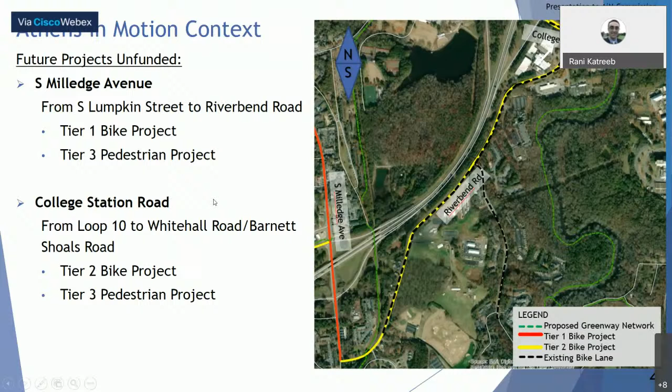On this slide you can see the existing bike facilities. It's unique that on Riverbend Road, the first 850 feet starting from South Milledge has no bike facilities and no sidewalk. The bike facility starts about 200 feet before the entrance of the UGA golf course and continues on both sides of the road all the way to College Station.

The sidewalk and multi-use path alternatives are proposed on the right-hand side along the entire alignment. It's important you understand the alignment nature and the fact that there's no bike facilities for the first 850 feet along this 7,300 feet of roadway.

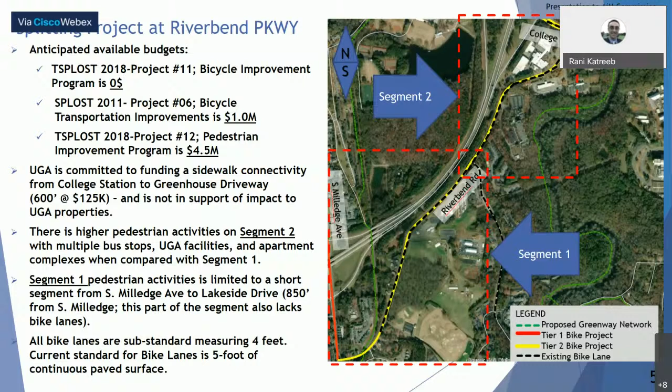Riverbend Road segment 1 starts from South Milledge with no bike facilities or bike lanes, crosses the railroad with no bike lanes, and then crosses Lakeside Drive, also with no bike lanes. There is a short segment of sidewalk that sits on private property. It's not typical today that we allow that; typically sidewalk is on public property. At 850 feet from South Milledge, the bike facility is substandard to today's standard.

Today's standard is 5 feet minimum, but we have 4-foot bike lanes and 11 feet of travel lanes that continue up to the end of segment 1, which ends at Riverbend Parkway, as you can see in the top right picture. Segment 2 starts from Riverbend Parkway on the same side and continues along that side up to College Station, with 4-foot bike lanes today and 11-foot travel lanes.

Rani, can you go back to that previous slide? I actually just rode this whole segment about an hour and a half ago. Oh my gosh, Carol, I rode it during lunch. Okay, and I noticed, coming from Milledge, one of the things as you come up past the golf course and the bus area where the UGA buses hang out...

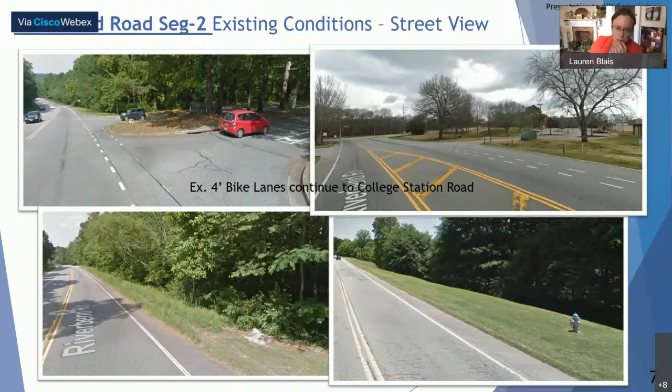Lots more, no problem. You guys have seen those slides with the details, including the length of the facility. This slide goes over the sidewalk alternatives, connecting South Milledge with College Station. It's good to identify the beginning and end of the project. As I walk you through each segment: Segment 1 starts from Milledge Avenue and ends at Riverbend Parkway. Segment 2 starts right before Riverbend Parkway and ends at College Station. So there is an overlap, and during our cost estimates we identified that if we select the entire project, there would be a cost saving because we're not doing the intersection twice.

All in all, we've looked at 4 different sidewalk alternatives, including a 7-foot sidewalk, with a cost estimate ranging between $2.7 to $6.3 million. Mainly this cost jump is because of major retaining walls along this project for some alternatives, which we will show here in a minute.

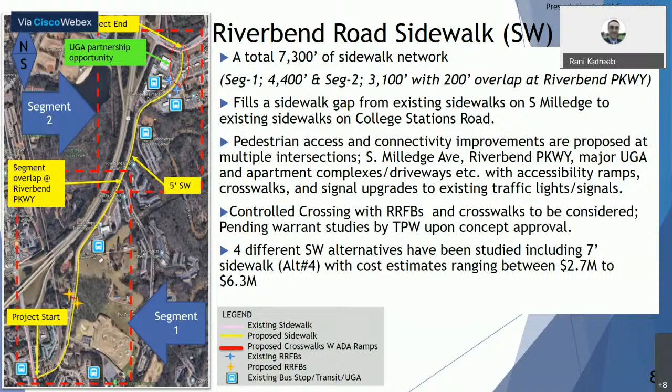The first alternative for a sidewalk is a rural section shoulder, 5-foot sidewalk. It has multiple advantages, including the lowest construction cost for a sidewalk, as there will be no curb and gutter. So it would be grading, a 5-foot sidewalk, and some drainage improvements behind the sidewalk. The sidewalk is further away from the road, the bike lanes are separate from pedestrians, only minor drainage improvements are needed, and no retaining walls.

The disadvantages: there is a large footprint that has a great impact on adjacent parcels, moderate need for right-of-way and construction easements, and high property impact. You can see the cost estimate breakdown for each alternative, for each segment. Segment 1 uniquely has that railroad coordination cost associated with it.

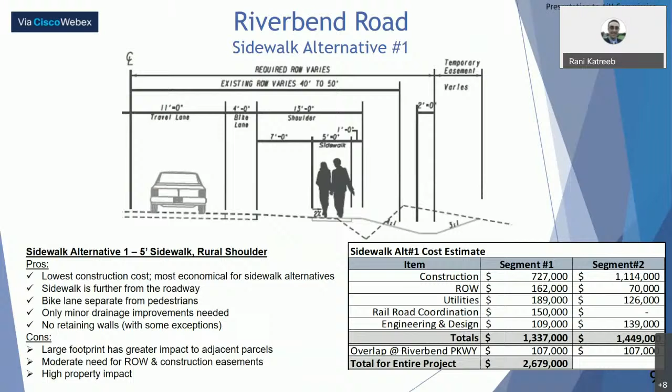With that, I'll move to the second alternative: a 5-foot sidewalk on an urban shoulder with curb and gutter. The advantage of curb and gutter is higher safety for pedestrians walking on the sidewalk, since cars are delineated where they need to keep their wheels. We do have a bike lane here too, so that's an additional safety factor. So there is a moderate cost for construction, bike lane separate from pedestrians, and no retaining walls.

The disadvantages for this option include some retaining walls that will increase cost, some pipe and drainage system will be needed, moderate need for right-of-way and construction easements, and moderate to high property impact. The cost estimates here are shown for each segment and also for the total alignment.

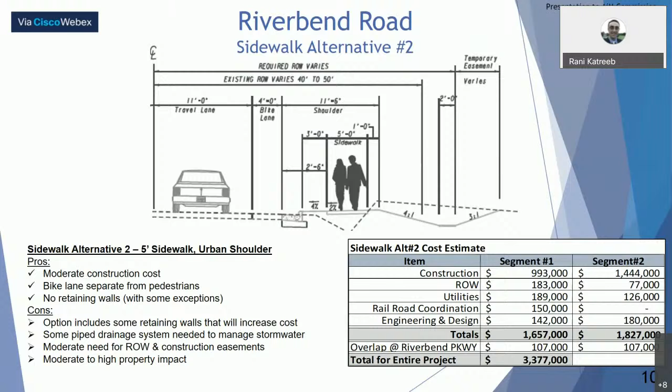The third alternative is a hybrid approach. It will help the department pick and choose what typical section to use to reduce cost, because when there is no curb and gutter, it's a lot cheaper than placing curb and gutter and having to manage that stormwater with an underground pipe system.

At the same time, we incorporated retaining walls to limit impacts and provide a concept that's more favorable to UGA. So we incorporated those walls and their costs, and you can see the cost increase dramatically for segment 2, for segment 1, and a little bit for segment 2, because we had to utilize walls for segment 2 in the second alternative anyway with curb and gutter. There's really no way without using walls on segment 2.

Pros: flexible design that optimizes field conditions, optimal footprint that reduces right-of-way cost in some areas, bike lanes separate from pedestrians, and reduces property impact. Disadvantages: higher cost compared with sidewalk alternatives 1 and 2, requires piped drainage system to manage stormwater, and includes significant retaining wall installations.

The fourth alternative, the real difference here is that we're showing a wider sidewalk than a 5-foot sidewalk. That means more impact, higher retaining walls, and more cost, with similar pros and cons to alternative 3.

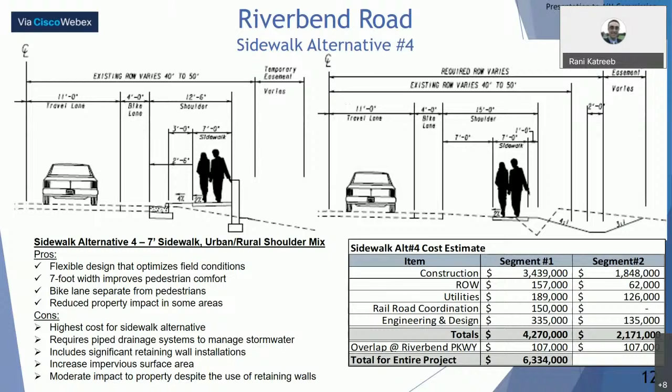The multi-use path alternatives run along the same alignment, starting from South Milledge and ending at College Station. UGA remains supportive for the amount that they stated, but they did not state a higher amount for increased cost for a multi-use path. So if we put a multi-use path in, I'm not getting the impression that they are willing to pay more for the concrete that would have to go from 5 to 10 feet wide.

However, this alignment of multi-use path goes along the same alignment as the sidewalk, with an overlap for the two segments at Riverbend Parkway. Three different multi-use path alternatives have been studied, with cost estimates ranging between $4.7 to $6.8 million.

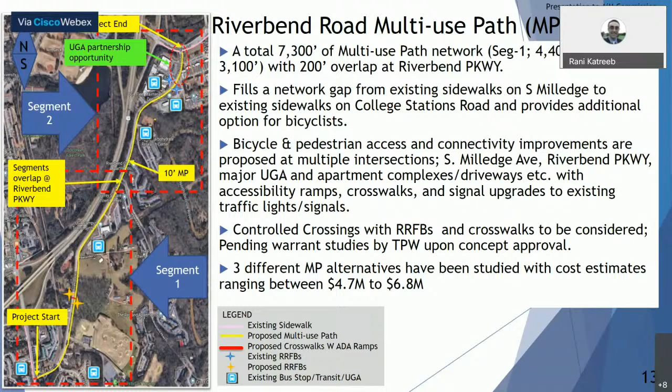The first alternative for a multi-use path is unique. Here we're looking at removing one bike lane, not both, just one from one side, and taking advantage of that existing 4 feet of roadway to build a 10-foot multi-use path. We also have to use retaining walls, but this concept does not show the use of retaining walls to the limits where the impact for UGA would be limited or minimal.

There will be impact to UGA with this concept, and therefore we provide alternative 3 for a multi-use path with more significant retaining wall usage to limit that impact.

Pros for this concept: most economical alternative for multi-use path, the cheapest among all 3. The 10-foot width further improves pedestrian comfort and provides separate shared facilities for bicyclists.

Disadvantages: large footprint compared with sidewalk alternatives, increased cost compared to sidewalk alternatives, bike and pedestrians share the same path, requires piped drainage system to manage stormwater, and high property impact due to limited use of walls.

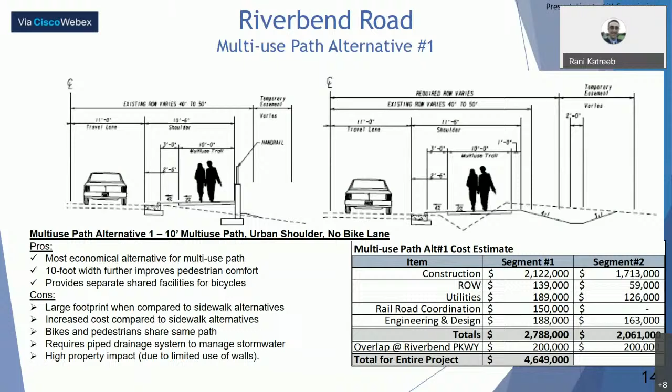The second alternative for multi-use path, we call it a redundant approach, but we still want to show it. We spent the time and effort to look at the alignment and impact, so we'll show it and talk about it a little bit.

This multi-use path adds a path with curb and gutter along the entire alignment from South Milledge all the way to College Station. This alternative has the most property impact along the entire corridor.

Pros for this alternative: 10-foot wide, further improving pedestrian comfort, with a separate bike facilities option. The cons: higher cost for multi-use path, requires some retaining walls, larger footprint with high impact to property, bikes and pedestrians share same path, requires piped drainage systems to manage stormwater, and increased impervious surface area.

We bring this up because stormwater and stormwater runoff is something we want to pay attention to. This specific alternative has the most increased stormwater added to the area, so we have to be very thoughtful of what we are doing here.

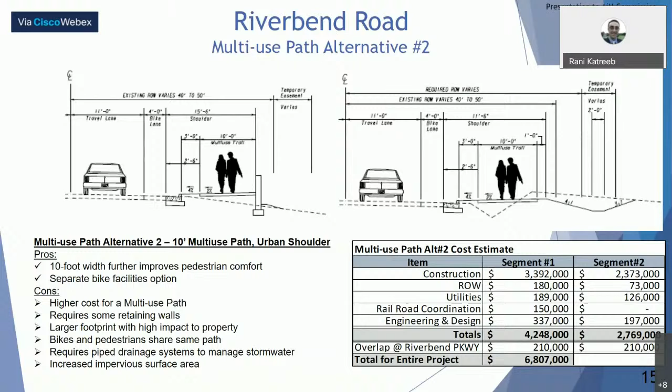The third alternative for multi-use path is the first alternative with heavy use of retaining walls to limit impacts to property.

The pros for this alternative: most expensive multi-use path alternative, with 10-foot width further improving pedestrian comfort and the lowest impact to property when compared with alternatives 1 and 2 for multi-use path.

Disadvantages: increased cost due to extensive use of retaining walls, increased cost compared to sidewalk alternatives, bikes and pedestrians share the same path, requires piped drainage system to manage stormwater, and includes significant retaining wall installations.

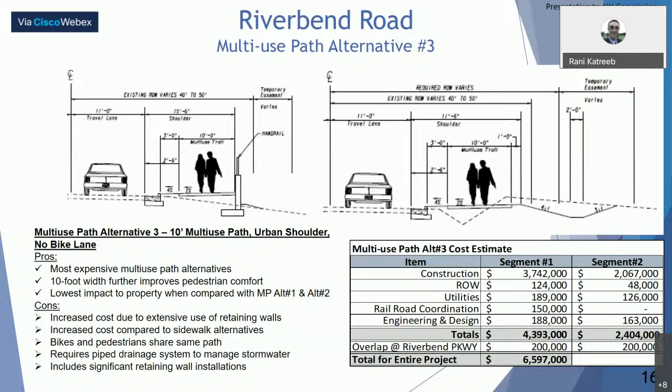With that, we get to the slide where we show the difference between all these alternatives and the cost estimates associated with them. I know last time this was a little overwhelming, but I'll take a minute and explain what I've provided additional this time.

For the sake of comparison, I added another slide to show the entire corridor comparison, not just one segment. So the first slide shows the entire alignment from South Milledge all the way to College Station.

The highlighted red with red arrows are more apples-to-apples comparisons when we compare a sidewalk that has little retaining walls with heavy impact to property, versus another sidewalk with that kind of impact to property but little use of retaining walls. When we use heavier retaining walls to limit that impact, we want to show that as well when compared to a multi-use path. That's what we've done here for the highlighted alternative in green on all three segments.

I'll be happy to go back and look at each one and take questions. I'll run over segment 1 and then segment 2, and then we'll talk a little about budget. We'll take questions from that point.

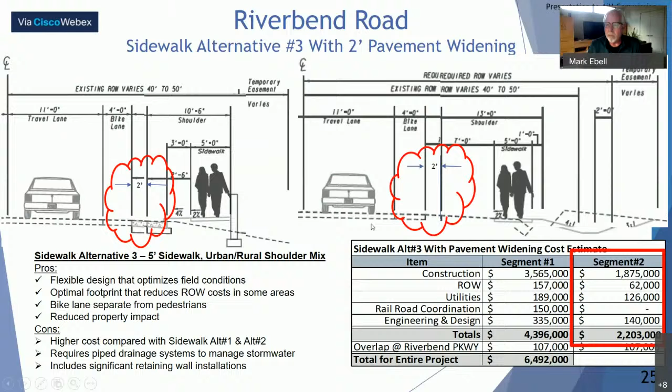So it seems like these are 2 very different segments, and segment 1 is the sort of budget buster based on UGA's recalcitrance and unwillingness to work with us on this. One of the things Jake mentioned earlier was the idea of restriping and widening bike lanes in segment 1, and then doing a 7-foot sidewalk or something, which was much less expensive, in segment 2. Is that still the case? It just helps me to think about these as 2 separate segments.

I also disagree that separating bikes from pedestrians and putting bikes on the road is a pro. I think we have multi-use paths, meaning it's okay to have bikes and pedestrians on the path, and putting bikes in a bike lane protected only by paint when cars are moving at high speed is not a pro to me. That's a con, and we haven't been listing that. Sure.

So the recommendations from the department, looking at the entire corridor with the available budget, it feels like we can make recommendations following these steps: move forward with concept approval for sidewalk alternative 3, segment 2, because it's supported by UGA, has the most foot traffic observed during bus movement, and preserves bike funds for streets with no bike facilities. As part of that approval, also approve a project concept with enhancement to existing bicycle lane connectivity along the entire corridor from South Milledge to College Station.

This enhancement we estimate to cost about $1 million. This would include widening the road to provide 5-foot bike lanes by adding 2 feet of paved surface, as Lauren asked earlier and was explained. So this is what we're talking about. For segment 2 alone, the added cost for this option is $320,000.

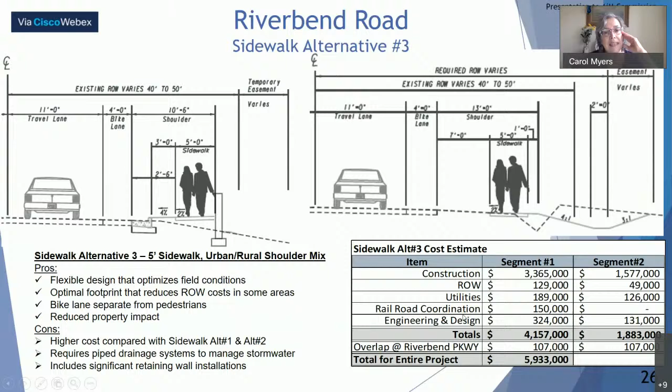Craig? Yeah, I was just going to ask, from a fundamental perspective, if our objective is to increase pedestrian and bicycle usage, which models show that results in that? It would seem like a waste to invest in something that's not going to achieve that objective. Similar to what Mark is saying—why do this project if no one's going to use the bike lane anyway, or very few people are? So it's worth considering if something costs more money but better achieves what we're trying to accomplish.

I also want to note, as I was going through the notes, why we're looking at multi-use path concepts versus this being originally a sidewalk project. In the existing Complete Streets policy, it says to consider more multi-modal transportation when the cost is under 20% more, and I think we're talking about a lot more than 20% more here. So I'm trying to remember, Rani or anyone else—we're addressing this as a sidewalk project. Is it somewhere in here as a bicycle project? What tier is it in as a bike project?

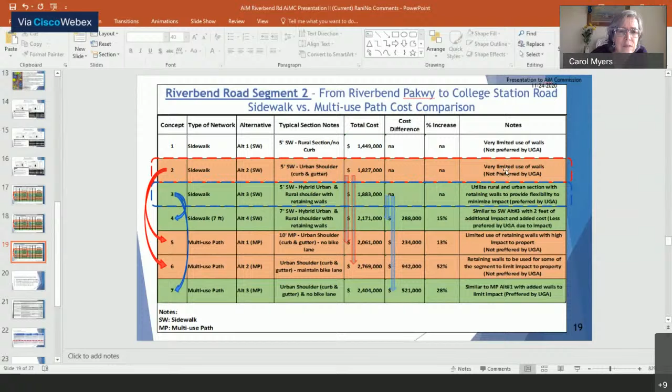Who is that second from for the minutes? I couldn't see. Craig? Yeah, I think it was from Craig. Yeah, that's correct.

So we're talking about this green number 3 here, right? For segment 2? Mm-hmm. Yes. Can I see what that cost is for segment 1?

Minimize. Wait, what happened? Okay, where are we going? Riverbend.

All right, so we want to go vote on that. And Jake, can I ask? Let's have the vote, and then I'm going to ask if someone can write that up as well, because that needs a lot of explanation. Do we want to have, we had a motion and a second, let's just vote on that.

All right, so we're voting on Jake's motion to recommend alternate 3, sidewalk 3 for section 2 from Riverbend to College Station, with nothing done at the present time for section 1. And is that what we're recommending?

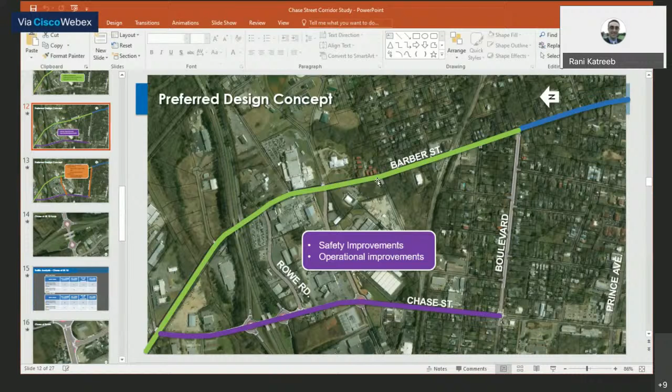I apologize for the 90-degree flipped image here for Barber and for Chase. And again, I'll go through these 3 different slides and then go into more specifics of what was approved as part of the Chase Street corridor plan.

One major issue was traffic failures, and when we talk about level of service, that was noted on the on and off ramps with GDOT. So we've looked at a high level concept, which we call corridor plans.

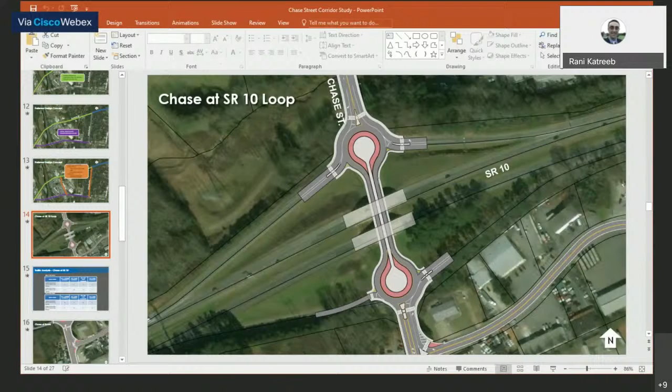That was approved as part of the agenda. What I'm showing here is just the high level concepts; the concepts themselves are not approved, it's just a sketch as they call it in engineering terms. These are some levels of service based on build and no-build conditions, and we can see that if there's no build by 2027, we'll get to a level F for Chase Street and State Route 10 inner loop and ramps. That's something we're trying to avoid by planning ahead.

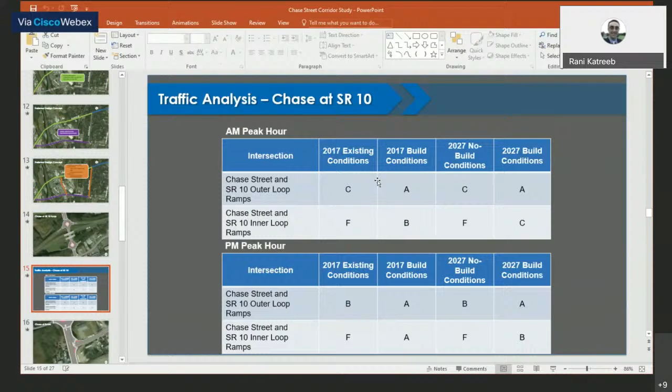Shortly after this presentation was given to Mayor and Commission, there was an opportunity to pursue a grant with the state and the feds, a TAP transportation project, and we were fortunate to be awarded the grant. This grant goes into stages. First they gave us notification and authorization that the money for design is there for Athens-Clarke County to pursue that funding. So that's where we are today, moving forward with the corridor plans and developing them into concept, followed by preliminary plans and then final plans. Sometimes between preliminary and final we'll seek additional funding, including up to about $6 million from the feds that requires a 20% local match.

The money for this project is coming from an intersection improvement program, SPLOST project, and therefore we're going in front of the COC to show them the same thing we've shown you guys. That's SPLOST 2011? Yes.

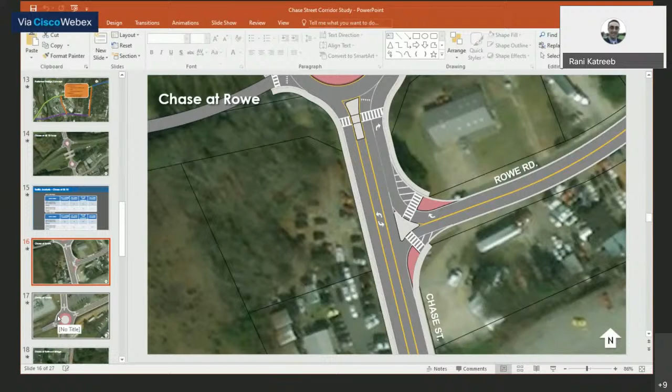And with that, the high level plans also include a roundabout on Oneta Street. I'm showing this slide specifically to show that within the Chase Street improvements, we'll be building a multi-use path facility within that roundabout. You see it here in dark gray on Chase Street, and most of it is on Oneta Street.

So that's the plan, and everything else you see in lighter gray is sidewalks for connectivity. The bike facility would be limited to this intersection improvement, transitioning into the addition of Share the Road signage along the entire corridor, starting from the CSX Railroad Bridge all the way up to Newton Bridge.

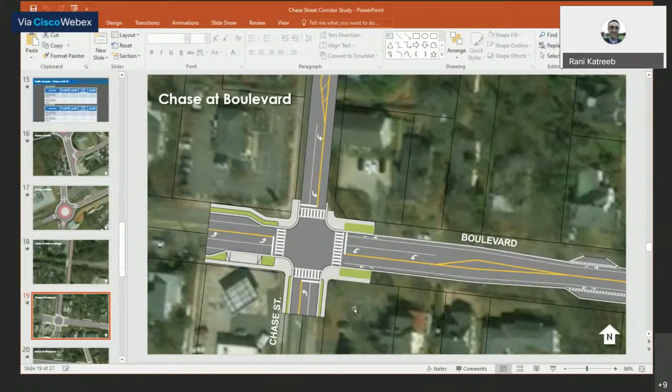This is CSX, and I believe Boulevard was also discussed then. Anyway, this is the presentation, and I didn't really have plans to share the entire presentation, but we did share it with you guys so you're aware of what took place back in 2018.

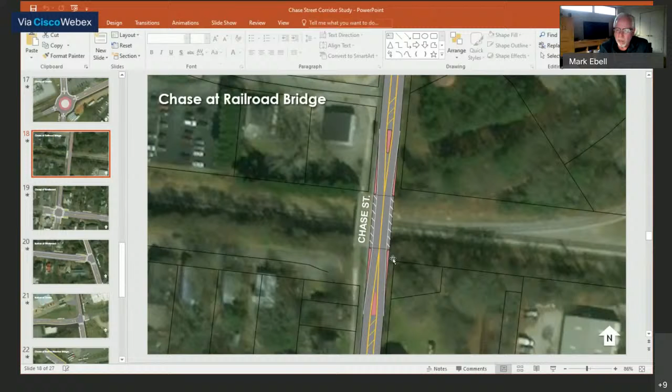Thanks, Rani. When we look at Chase Street, there's what looks like a middle lane that's kind of a pseudo turn lane in the yellow striping, and we see that on Oneta and in various places. You see it here on Chase. Why do you need a turn lane when you have a roundabout? I don't understand that. That's a good question.

Again, these are high level plans, we did not dive too deep in there. Now, the fact that this is heavily industrial, sometimes those tractor trailers... and if you're welcome to read the agenda, it has a lot of history, and it goes all the way back to 2016. In 2016, the department did a software run to see if we could do a road diet on this segment, the entire segment of Chase Street.

If we reduce or eliminate the turn lanes and add bike lanes as an option, how would that be, or how would the intersections function? Now, the software did not take into account the distance between intersections. It considered those intersections as meeting current standards, and where they are with their permitted right-in, right-out, or you can enter from any side you want today, for example on Rowe Road.

So talking about theory versus practice, this is a great example where it did not succeed. Where the software said it should be great, it should work, when we implemented taking out those turn lanes, it failed, and it failed drastically because this is a main route for tractor trailers. When they try to make a turn into a driveway, they block the entire travel lane, and vehicles, while they can technically go onto a bike facility, it's not recommended to go into a bike lane, so they couldn't go. So you get this truck standing in the middle of the road, blocking the road.

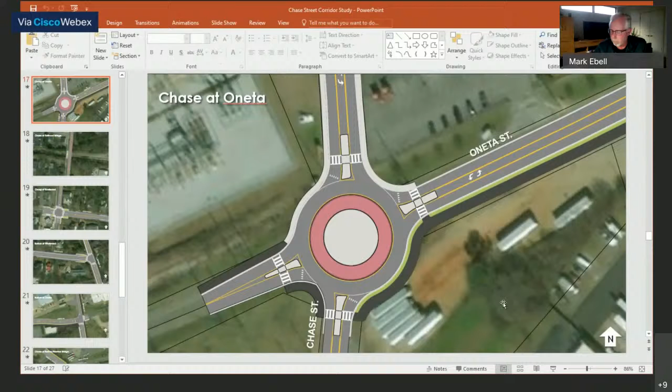Thank you, Rani. Unless there are any more questions, I want to move us on so we can get through the rest of this. We good?

I don't want to belabor this, but I love the project and it's great to see it. I'm much more familiar with this area. I am curious about the Oneta area too. I don't need a lot of explanation, but I didn't think it would have that much traffic that it would merit a roundabout. It seems to me, just from usage, that it would make more sense as an either-or scenario, that a roundabout at the Boulevard Chase intersection would make more sense than there. But I'll just throw that out there. Not really expecting a lot of feedback right now.

Thank you, Craig. All right, let's move on to the next thing, which is other updates from Bike TPW. I'm not sure we have any because we don't have Stephen on here, but from the Athens in Motion chair—and I'm including the co-chair here—Lauren wants to talk to us briefly about an issue with the Firefly. So I'm going to turn it over to Lauren for a few minutes.

If Lauren, give me just 2 minutes. Stephen asked me to give an update from TPW, specifically for the bike ped coordinator position. Currently it's open. It's going to close next week, by end of next week, and we're hopeful to get some candidates that we can interview and fill this position as soon as we can. And for public comments, Stephen got back with me by text, and there have been none.